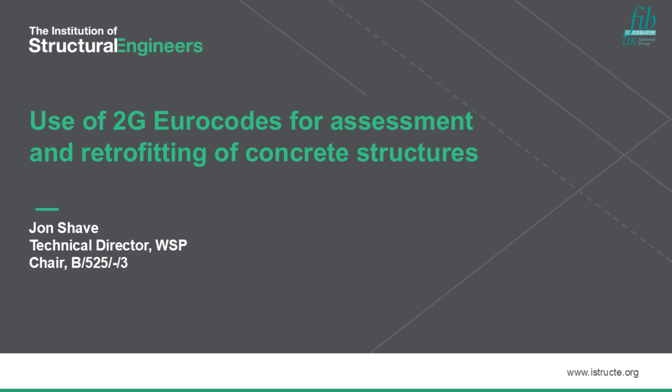Good morning. The theme today is retrofitting, strengthening and repairing, which are all interventions to upgrade and rehabilitate existing structures. But what I'm going to talk about is that crucial step we need to carry out first: to understand whether such measures are needed, whether the structure might be perfectly fine as it is. That's called structural assessment, where we determine or assess the capacity of a structure to resist loads without reaching a limit state, such as ultimate limit state, collapse scenario in the extreme case.

So what I'm going to talk about today is how the codes have evolved over time to allow us to carry out this process of structural assessment accurately and safely, culminating in the latest documents being published in the second generation of Eurocodes.

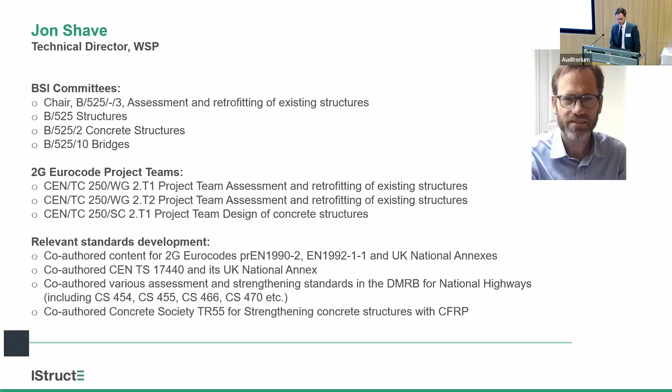So this talk is about dealing with existing structures and specifically about codes. And we will get to the new second generation Eurocodes. But before that, a bit of history.

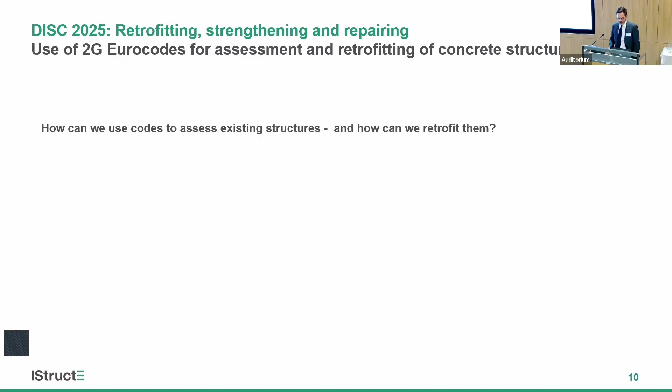Going back a few thousand years, let's look at one of the earliest building codes: the Hammurabi Code. It dates to 1750 BC. It's a Babylonian legal text, which you can see in the Louvre Museum, and includes a wide variety of topics with quite harsh judgments, based around the principle of an eye for an eye sometimes. It certainly placed the onus on builders to make sure buildings were robustly constructed to avoid the severe consequences of a collapse, and some of the laws there did certainly focus the mind.

While there were no calculations done back then, the idea that the potential consequences of failure should be a key consideration in design and construction was very firmly established. The principles we can take forward are that if we invest more in more reliable structures in design and construction, we might avoid collapse later on. And there's this idea of the consequences of failure needing to be considered, because the consequences and associated cost of a structural failure can be severe.

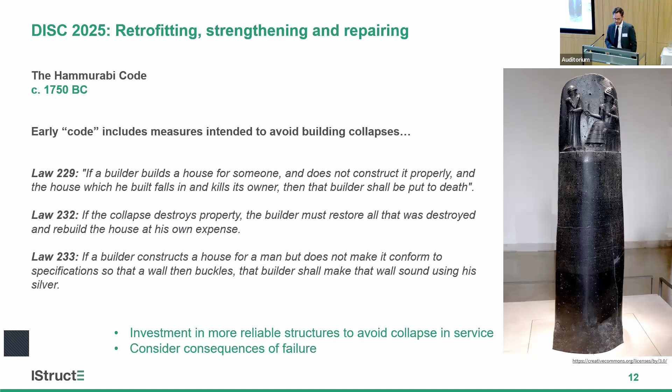These are driving questions of design and construction, and not explicitly about managing or assessing existing structures. And for that, we need to fast forward a bit.

This is St. Peter's Basilica in Rome, completed in 1626. About 120 years after it opened, some deterioration was observed - some cracking, some distress - in the dome. In 1742, the Pope ordered a survey to determine the causes of the distress and to devise some remedial measures. Interestingly, they used mathematical calculations and analyses to try to assess the structure, understand the causes of the distress, and recommend what measures could be taken.

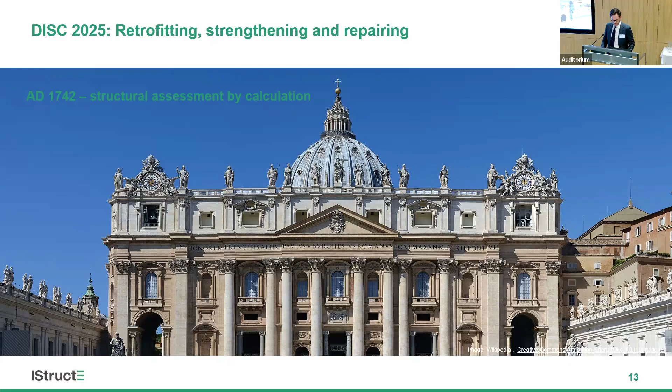This was pretty groundbreaking at the time - one of the first ever assessments of an existing structure based on calculations. There was some controversy about whether the analysis was actually correct, particularly whether the behavior suggested by the analysis was consistent with the behavior of the structure as it was behaving in situ.

The quote on the screen there might have come from 1742, but many of you working in the field of assessment might recognize the challenge of being asked whether the theoretical analysis actually aligns with reality.

It reads: if it were possible to design and build St. Peter's Dome without mathematics, and especially without the newfangled mathematics of our time, it would also be possible to restore it without the aid of mathematics and mathematicians. Michelangelo knew no mathematics and yet was able to build the dome. Heaven forbid that the calculation is correct, for in that case not a minute would have passed before the entire structure would have collapsed. So there was some disagreement about the analysis of the causes of the distress, but there was consensus about the need for remedial measures.

They put five additional rings in 1743. I think the interesting thing for me is how we're still having the same challenges now. It highlights how doing an assessment can be technically harder than doing a design, particularly regarding the methods of analysis and the need to be as accurate as possible.

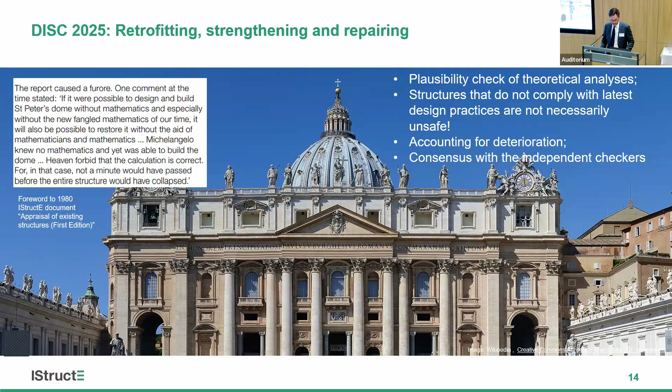So we've been talking more generally about buildings so far, but in the UK, it was the need to assess and look after our aging highway bridges that resulted in the most complete set of assessment standards that we have, which sit within the suite of documents known as the Design Manual for Roads and Bridges, or the DMRB. So in 1984, we had a new code for assessing bridges, BD21, published.

That included a more realistic loading model, representing up-to-date highway loads, including some heavier vehicles that were previously not designed for, and which recognized in assessment it might be acceptable to focus the calculations on the ultimate limit state in most cases, as long as inspections can be carried out to confirm serviceability aspects are performing as expected.

It also enabled the ULS calculations to focus on the load combinations that might most realistically be expected to be critical. So, for example, in many cases, there's no explicit need to look at thermal actions because in a ductile structure, the displacements can be accommodated through yielding without affecting the collapse load.

And for many typical motorway bridges, we wouldn't expect them to collapse as a result of wind actions. So there's some kind of simplifications that were permitted to allow us to focus on the most important aspects and avoid potentially over-conservative assessments of capacity that wouldn't have been very helpful.

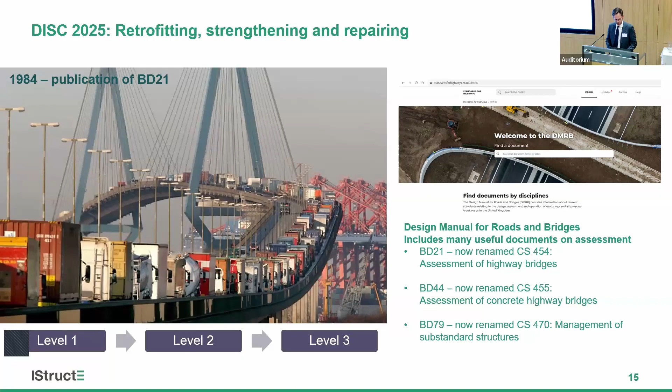So in particular, for concrete structures, there was advice on how to take measurements of concrete strength from the actual structure, evaluate a worst credible strength, which could sometimes enable higher concrete strength to be used compared with what was originally specified. There was also advice on proceeding from elastic analysis to incorporate some plastic behavior, such as using yield line analysis, which could demonstrate a higher load capacity in some cases.

There's also a document about how to manage substandard structures and evaluate and control the risks, so that suitable interventions can be made, whether that's a reduction in the load that the structure can experience or the need for modifications such as strengthening, and in the most extreme examples, by closing the structure where there's immediate risk to the public.

So a lot of aspects that are simply not discussed at all in design codes, but which are very important if you want to pragmatically manage existing structures.

So with the whole DMRB suite, the UK was ahead of many other countries by having a suite of documents specifically about how to carry out assessment and retrofitting of existing structures, taking account of the important differences between how we can manage existing structures and how we should design new structures.

And while this was not technically a set of national standards, but rather a set of client requirements for a particular set of structure types, the highway bridges, documents do provide a detailed set of rules that can also be very useful when considering other types of structures, and they continue to be a valuable resource when assessing existing structures.

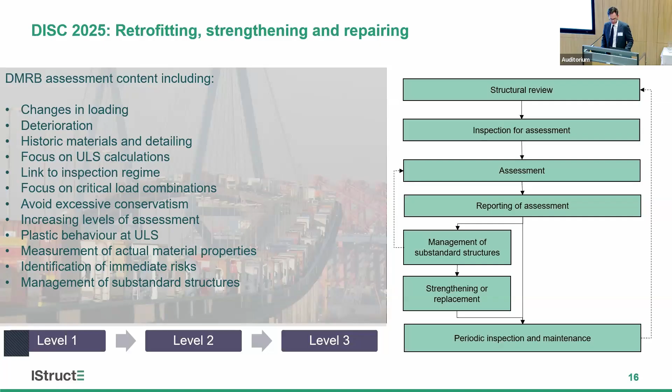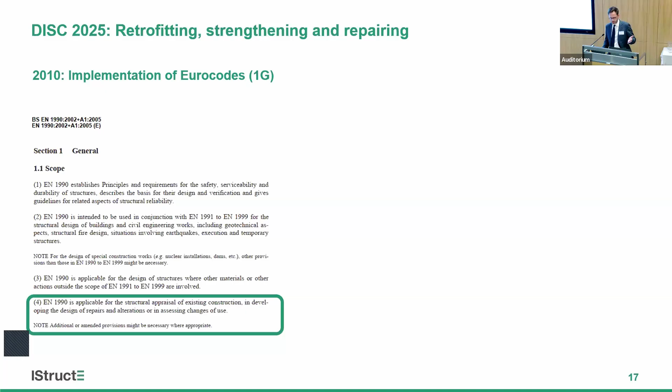So in general, the first generation Eurocodes were not really intended to be used for existing structures. And while we were using Eurocodes for the design of new structures, we did not use them in general for assessment of existing structures, because it just didn't cover how to do an assessment or any rules about how to deal with older structures with older materials and details.

So this started an era where there was one set of standards, Eurocodes, being used for design, and potentially a completely different set of standards being used for assessment of existing structures, which might be the DMRB if it's a bridge, or if it's a building structure, it might be the design standards that were used to design them originally.

So this kind of inconsistency between the standards being used for design and assessment could be an issue, particularly if there's then a need to do some modifications. It's not very convenient in those cases where modifications are needed because of that inconsistency.

For this reason, in some rare cases, it was decided to invest some efforts in seeing how we could use the first generation Eurocode methods for the assessment of existing structures, by expanding it and bringing in some extra rules as needed. One of the first examples of that is the Hammersmith flyover, where you had severe deterioration of the post-tensioning tendons, which required a strengthening scheme using additional external tendons, which was done to Eurocodes. But the assessment was also done to the Eurocodes as well, which was very unusual at the time. This is kind of the first big example of that, supplemented as appropriate with additional or amended provisions.

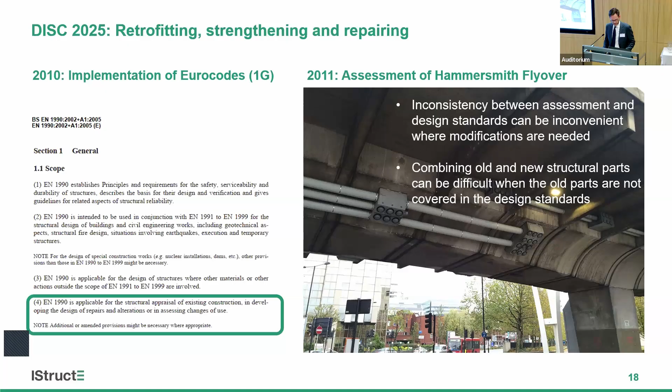For buildings, we have an IStructE document, the appraisal of existing structures, which provides some guidance on carrying out appraisals of existing structures, particularly useful where there's going to be a change of use or a need to assess the existing building for a different loading or different configuration. Most of the content of this document, although it's from 2010, remains valid and useful, covering a lot of the key issues you'll encounter - an excellent resource still.

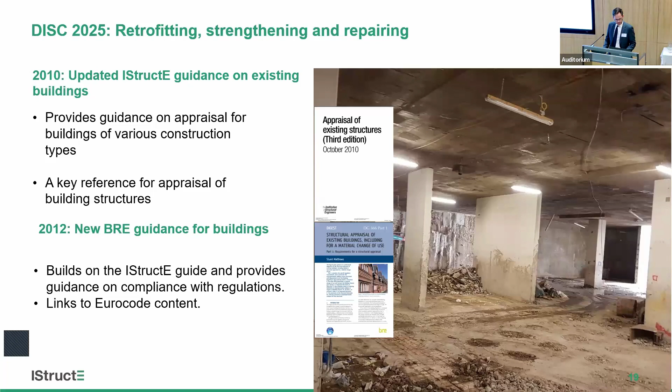We've also got accompanying guidance from BRE Digest DG366, which links to the building regs and how issues like disproportionate collapse can be considered in existing structures. Again, that's very useful. We've also got some FIB documents on this topic.

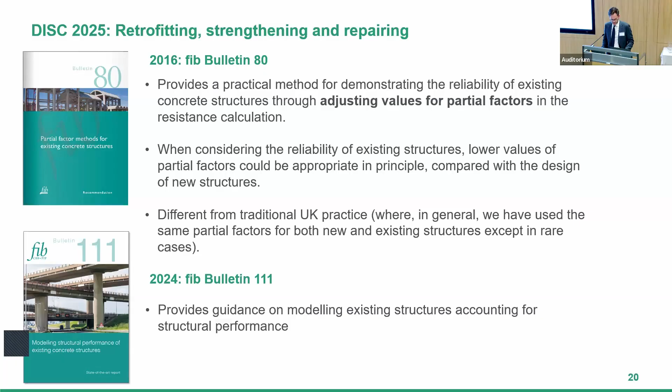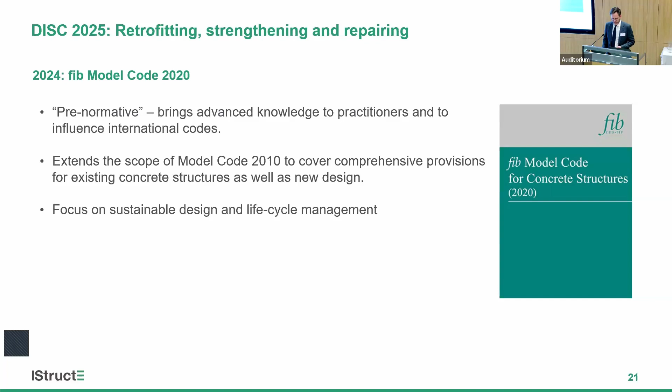We also have the new FIB model code, which was published in 2024. The big step forward in this version is that it covers existing structures as well as new structures. This means there's a lot of extra content useful for understanding how existing structures work. It's not technically a standard, but it represents the latest understanding, and it will feed into standards development worldwide.

In 2020, we had the updates to the whole suite of DMRB documents, and the documents used for assessing bridges, which we've mentioned already, were also updated. Particularly CS454 for assessment of bridge structures and CS455 for concrete bridges.

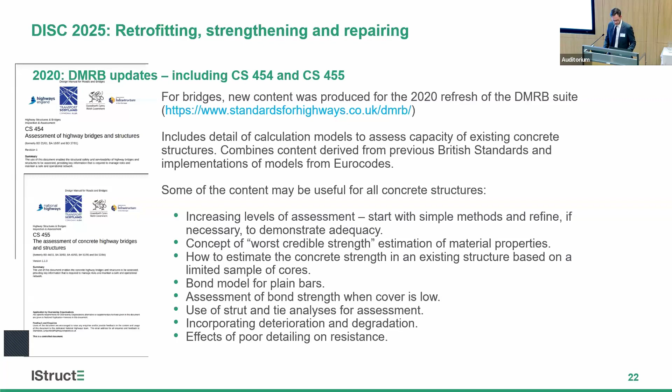So a lot of these issues were very relevant in the development of the second generation Eurocodes. Now we have the second generation Eurocodes, where unlike the first generation, we've got the incorporation of material about assessment of existing structures.

That has been achieved in some of the new second generation Eurocodes. You can see the ones that have got a green tick here have got some content related to existing structures, not all of them. But concrete structures at the moment is the only structural material where you've got specific content on how to do assessment of existing structures in the new Eurocodes.

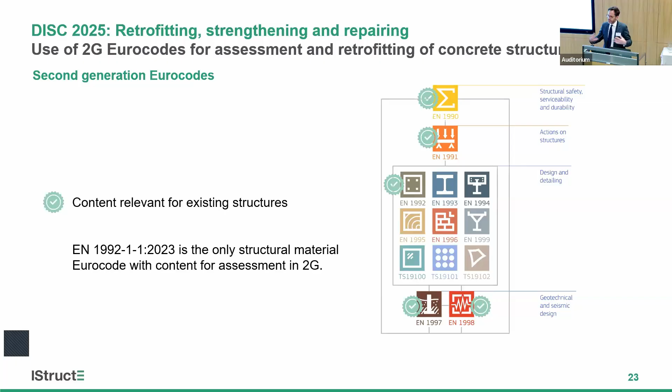We also have the overall framework in EN 1990, which will now include a part 2 for assessment of existing structures, which will enable us to know how to carry out those assessments within the Eurocode suite and how to deal with the issues of partial factors and combinations and getting data from the structure and all of those kind of things.

So the timeline for Eurocodes, you can see we're now approaching the culmination of over 50 years of work on Eurocodes. We've got the implementation of the second generation documents happening in 2028. Many of them are already available, and the rest will be available next year, but not implemented in general until 2028. There's a lot of work happening right now to develop the national annexes, which will be needed for the UK implementation.

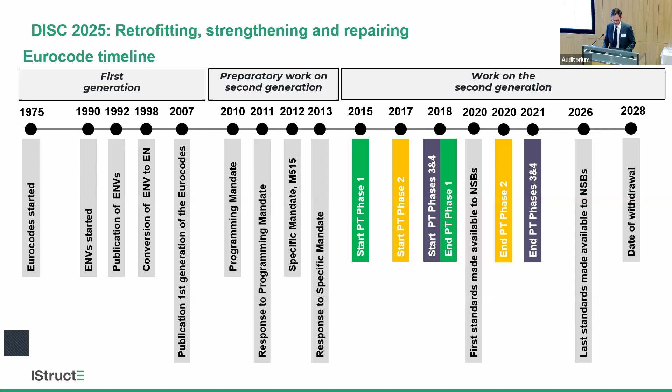In 2023, we saw the second generation Eurocode 2, EN 1992-1-1, published. That includes some content specifically relevant to existing structures, and it means that some of the key material specific aspects of resistance can be assessed using Eurocodes according to the material in some of the annexes.

So we have Annex I and J, which are informative annexes. Annex I covers assessment of existing structures. Annex J is strengthening with CFRP.

Because they are informative annexes, we have some leeway over how and if they are implemented in the UK. While Annex I is a big step forward in indicating how the Eurocode 2 resistance models might be adjusted and applied for older structures, it's not as extensive and complete as what we have in the DMRB already. So there may be some aspects of existing structures where the use of DMRB might be more useful than using Annex I, and vice versa.

So if you're doing a national highways bridge project, it'll still be a requirement to follow the DMRB, but the national annex to EN 1992-1-1 will include some reference to the need to align with client requirements, particularly thinking about DMRB for highway bridges, but also other documents for specific asset types and clients.

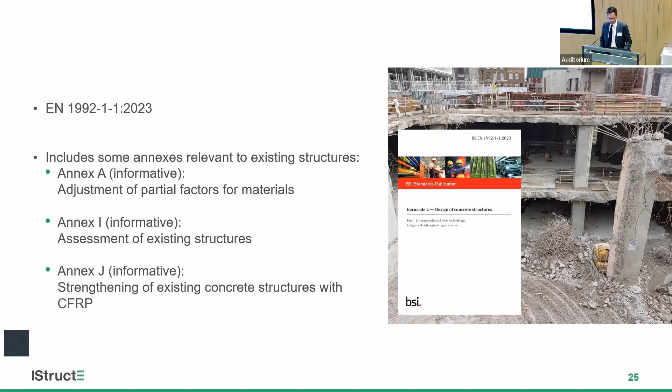But these Eurocode annexes are a big step forward by having a consistent approach across design and assessment to the different kind of resistance models, developed by a cross-European panel of experts. It's the first time that we've had this content in a standard, meaning we can use consistent Eurocode-based approaches going forward.

Now we come to next year, you'll see the publication of the new Part 2 of EN 1990, and this covers assessment of existing structures, gives the whole framework for the basis of design, and deals with those aspects that are not material specific, because the material specific aspects are covered in the relevant Eurocodes. So such as the way that the actions are combined and factored, how we can use the known information from the actual structure to improve the accuracy of the assessment and reduce uncertainty.

There are some aspects of this basis of design that are the same or very similar in principle for both design of new structures and assessment of existing structures. There's been a need in developing this document to link back to the main EN 1990 requirements for new design and not duplicate the respective clauses. But as we've seen, there have been significant differences between design and assessment practices, so this document focuses on those differences.

The key aspect is that while there's now greater consistency between how we carry out designs and assessments, with both now incorporated into the Eurocode suite, there's also flexibility and guidance to treat existing structures differently when appropriate, maybe through using different partial factors, or gathering data and updating the models and basic variables so it's more appropriate to the specific structure being assessed.

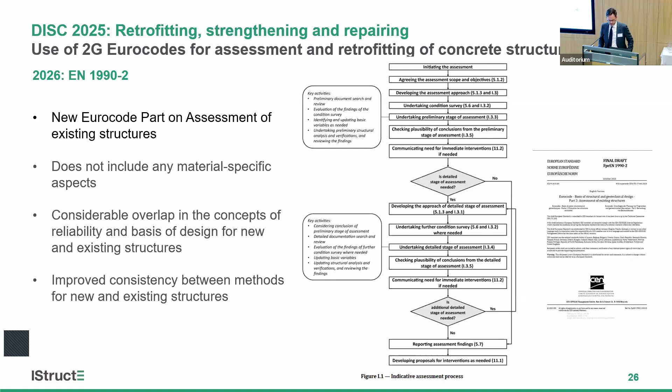So just now looking at the contents and some edited highlights of the new document for assessment of existing structures. It might seem a bit odd, but the first thing is to define what's meant by an existing structure. The definition itself is a bit circular, being a structure that exists effectively.

It was felt important that we included that definition, partly because there was a concern that the kind of relaxed rules for assessment shouldn't be used as a backdoor way of getting relaxed design rules for a new structure. So there was a sense that we needed some way, particularly in countries where the Eurocodes have a kind of legal status as legislation, for the national annex to give some definition on that point, because it's not something that could actually be in the document itself.

So for that reason, we have this note which allows the national annex to give additional conditions for existing structures to which this document applies, if needed.

In this structure, we also have the principle that we saw earlier in the DMRB, that there's a focus on quantitative assessment and ultimate limit state. But the document also allows the use of qualitative assessment methods where the conditions for use of that are satisfied.

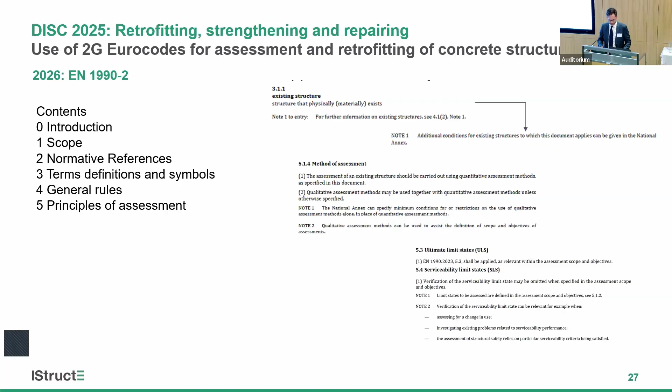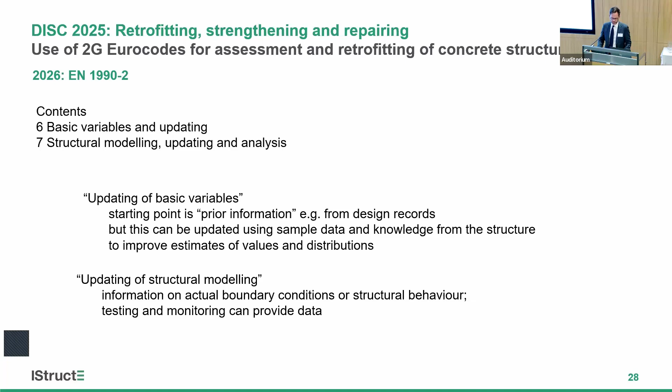So the idea of updating the variables is a word that crops up quite a lot in the new document - updating. It's the basic variables, but also the structural models. Updating these crops up a lot, and it's all about using the data and observations from the structure to update the knowledge about the structure and improve the assessment effectively. This is a key part of getting a better outcome, sometimes as part of an iterative process.

We have a focus on the partial factor method, as you might expect, as well as acknowledging that there are other methods that could be used to carry out an assessment. But we're expecting that the vast majority of assessments will continue to be done using the partial factor method, so that is where the main focus is.

There's the facility in the document to either use the kind of default or fixed partial factors, such as the ones you use for design or similar ones to those used for design, or possibly to adjust or calibrate the partial factors where the national annex permits that, with some guidance on how to do that.

So the question of resistance models is a crucial one, particularly when looking at issues of deterioration and older materials and products that might be found in old structures. In general, what we need are assessment resistance models that account for the things that we might encounter in existing structures, which are probably not going to comply with all the design requirements in the Eurocodes for design, but that doesn't mean that they're unsafe. And that's a key point.

So we do have some limited resistance content for assessment of concrete structures now in second generation, but not for other materials in the other Eurocodes. So we're still expecting that there'll be a need to look beyond the Eurocodes when doing assessment, particularly when assessing resistance where there might be materials and deterioration types that aren't covered yet.

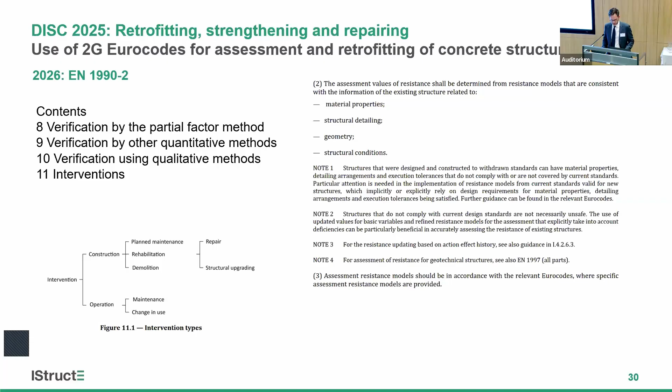Then there's a lot of annexes as well, which provide some additional rules and information. I won't go into detail here, but you can see that depending on the scope of the assessment and the structure type, there's some content here that could be helpful with carrying out the assessments.

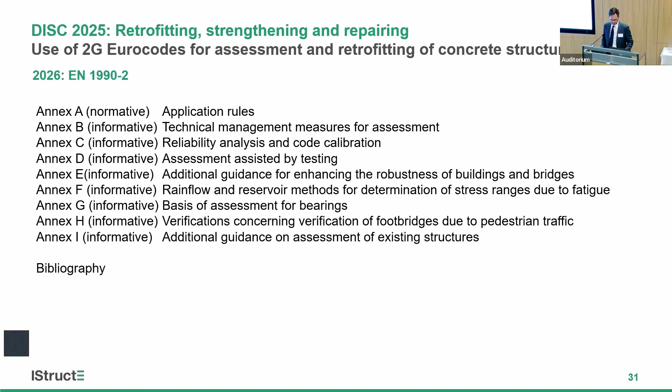So yeah, these new second generation Eurocodes will allow us to have a more consistent approach for existing structures with the way that we design new structures, and crucially with the way that we design the modifications that we might have to do as a result of the assessment.

And for concrete, there'll be the relevant content we need to assess older structures, including use of plain bars, which isn't in the main Eurocode, and effects of deterioration, and potentially also where you have details that are non-compliant for design. In some cases, there may be justification to adjust partial factors, and now we have a mechanism to do that.

And it's not going to be fully comprehensive, but we'll need some additional guidance and documents for some structures. And for bridges, we'll continue to use the DMRB, which for concrete structures does have more content than what's in Annex I as well.

So today, yeah, we've covered over 3,000, nearly 4,000 years of content on codes, from the Hammurabi Code, and then the controversial analysis of St. Peter's Basilica, and through all the methods used for assessing concrete bridges and building structures, right up to the latest second generation Eurocodes.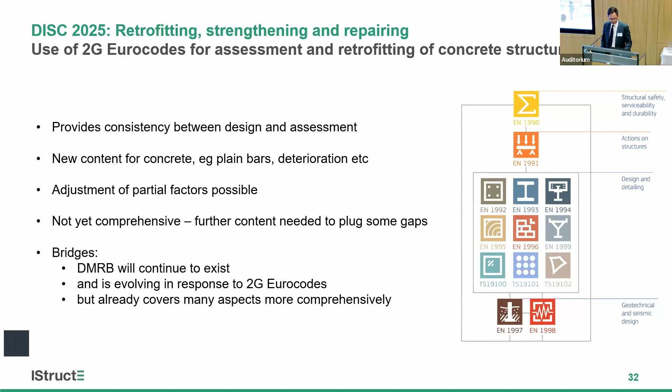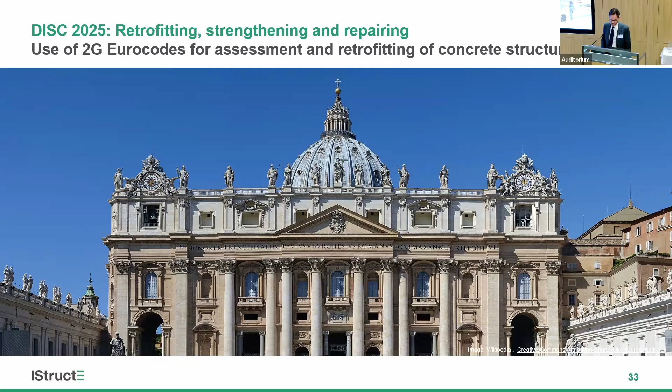Just like St. Peter's Basilica, there might be some healthy challenges over the details and the refinement of the assessment methods. But if we can achieve consensus over the need or the lack of need for interventions, then that's a good outcome, which will enable us to be sustainable in the way that we extend the life of the structural assets, whilst also understanding the structural risks and the need for management actions.